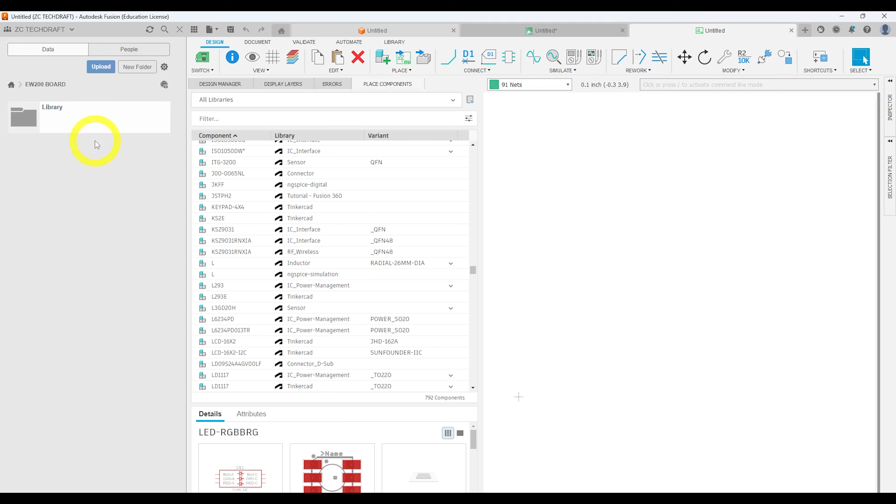So we are going to go ahead and upload some of these to our folder. I'm going to click New Folder and create Electronics Library. So this is going to hold all the components that we have to make for this project. And then the general folder will just contain the overall board and schematic. I'm going to double click on library. I'm going to click upload, select files,

go to that file, and you want the Pico package through hole v3. I'm going to hold control and also select this Raspberry Pi Pico library. The SMD and the V2 are other types of Pico boards that are for surface mount soldering or something, and we only want the through hole one, so we're going to just upload that one. All right, that's going to take a minute to upload.

And you can see now we have a Pico through hole with headers already attached to it, and then a Pico library as well with the component, with the symbol, and the package for through hole.

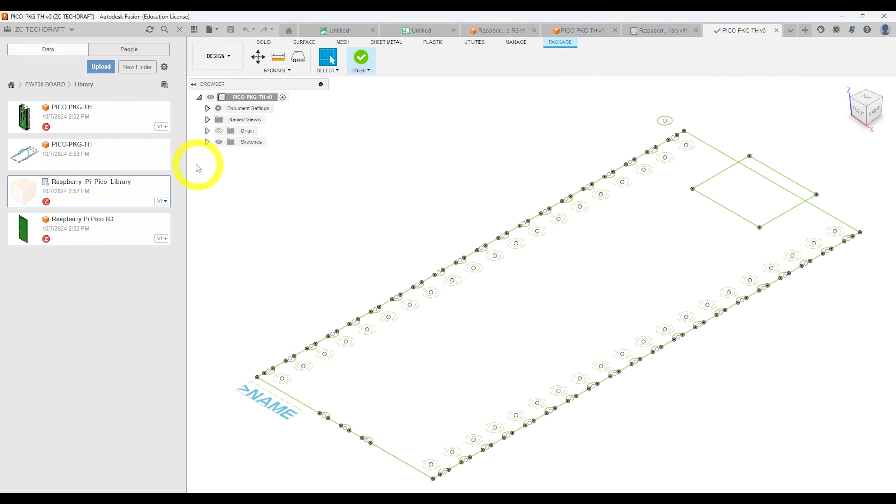Now, our Pico package through hole isn't linked to the 3D model. So I'm going to right click and click create new 3D model. Click save. And I can just drag this Pico package through and drop it in there. And that should be lined up. So I'm going to click finish. And now that is linked to it.

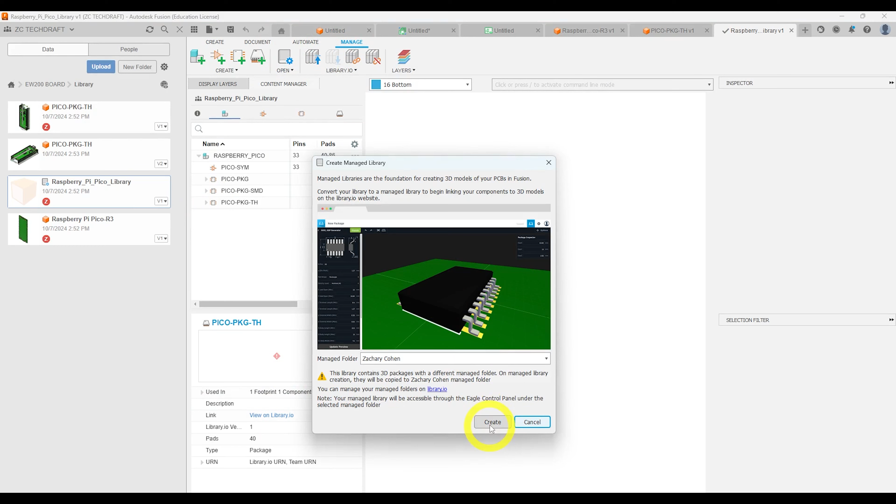So if we go back to our components, we see under Raspberry Pi Pico, Pico package through, we have a board attached to it. All right, we're going to upload this all to library.io. And you can just click create. And this is going to put everything on a web server so that you can access it a little bit easier, maybe down the road if you need to.

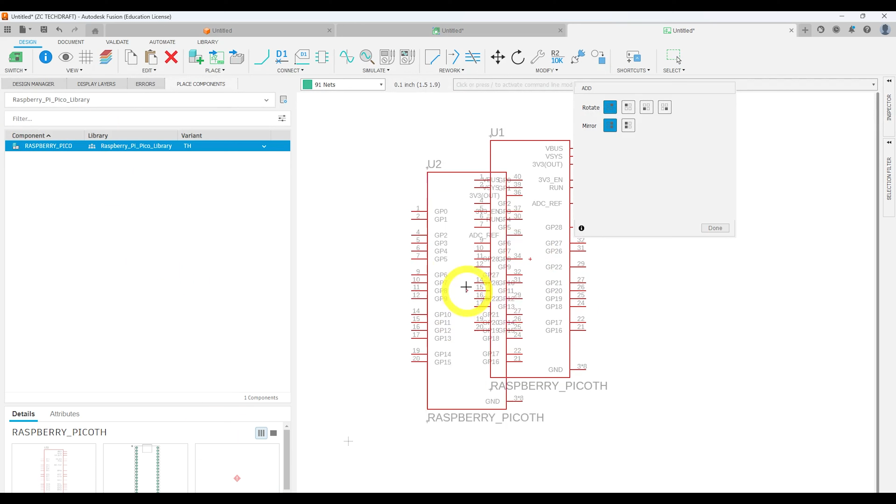All right, so let's close some stuff here because we don't need it. And we're back in our schematic. So let's go ahead and place our Pico first. So I'm going to click this drop down and go to Pi Pico. And I want the through-hole version, and it's saying it's not linked to the 3D model, so I'm going to have to fix that. But let's first place our Pico in our schematic.

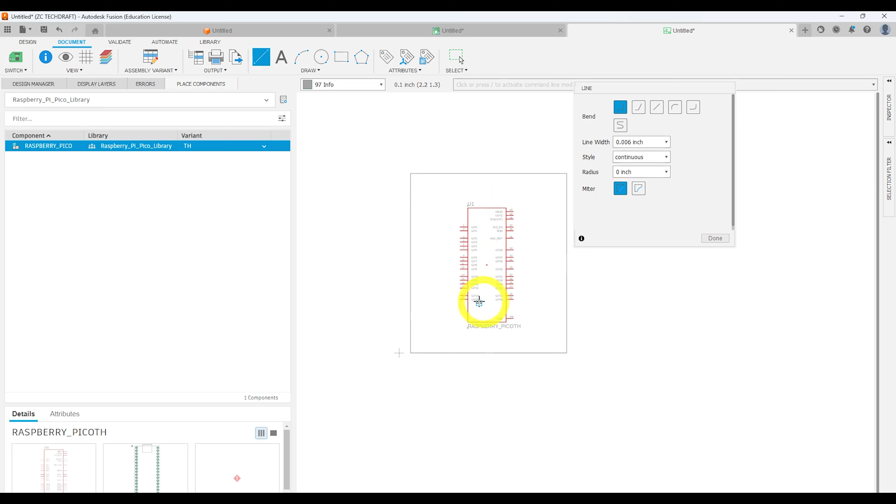And I'm going to go to Document, Line, and I'm going to draw a box. So I'm going to go to Info and draw a box. So we're going to want a box around each of our sets of components so that we can kind of keep them labeled. And I'm going to put text here that says Pi Pico. And maybe make that a little bit bigger.

So I'm going to click Inspector and change my size to, say, 0.15. That's a pretty good size there. All right. Now, we need to add a few things to this. So we have each of our GPIO pins. We have our V-bus and V-sys, our 3.3 volt out, and our ground. And we need to attach some of these pins. So I'm going to click my drop-down and place components. And I'm going to go to Power Symbols.

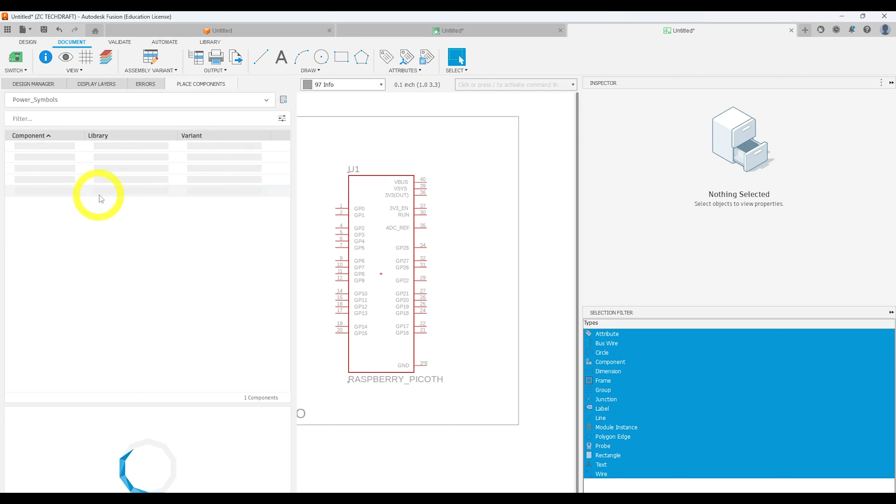And I'm going to place a 5 volt symbol up here. Click OK. 3.3 volt symbol up here. Click OK. And then I'm going to scroll down to GND for ground and place that down here. All right, let's go back to design.

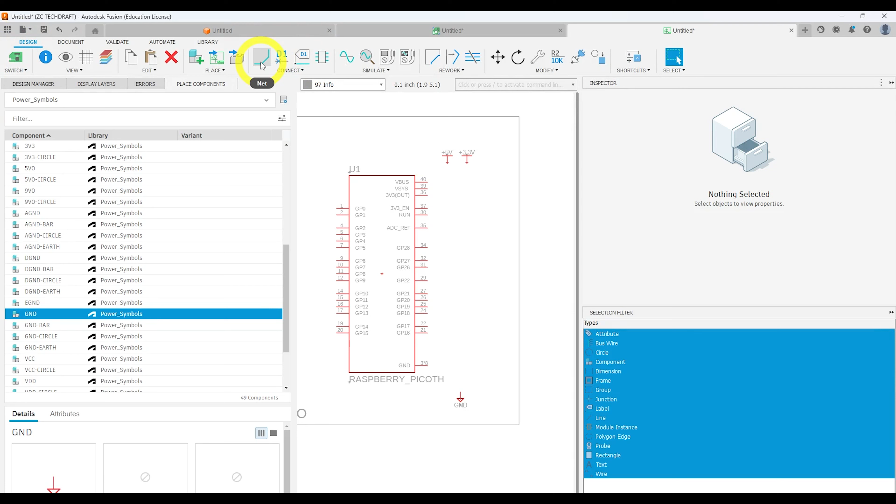And nets are like wires. They're the connections that you make. So I'm going to click on this. And I'm going to click my VSys to 5 volt. And my 3.3 volt to 3.3 volt. And my ground to ground. Now, there are some GPIO pins that we're going to use to control everything, but we don't really know what those are yet. So we're going to leave those blank, and we'll add to them as need be.

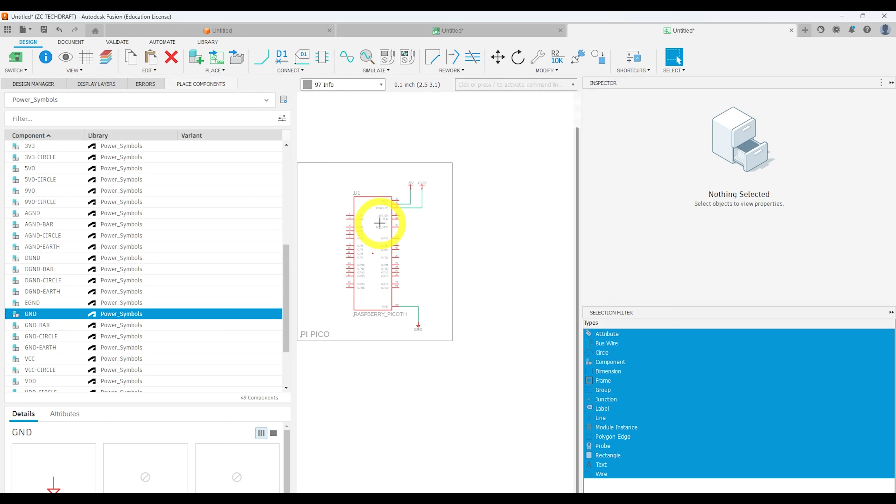So let's go ahead and first place our component, being our potentiometers. So we're going to have 2 potentiometers on this, or variable resistors, so that we can change color of something or have them be really any input we want. So go to potentiometer_trimmers. And we're going to go down to this 3310Y-001-104L. And I'm going to place 2 of those.

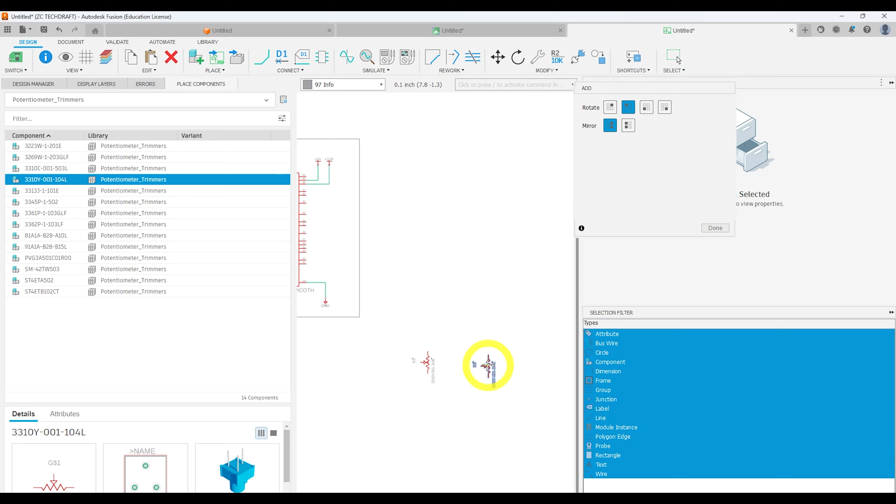Now I want to rotate this. So I'm going to right click to rotate. And I'm going to place 2, as I said. And press escape to get out of the command. All right, let's go ahead and go back to document and line. And make a box around them. I'm going to borrow this Pi Pico, copy and paste. And change that name to POTS. POT is short for potentiometer, and we have 2, so POTS.

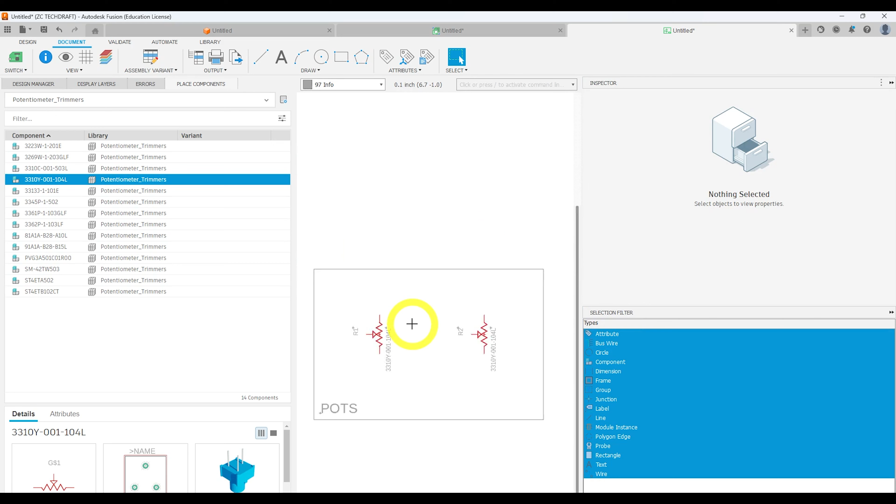All right, go back to design. These have a resistance value to them. So I'm going to click value and click on the resistor. And it's saying it doesn't have a definable value, but that's not really true. So we're going to click yes, and we're going to label this as 10K. And then do the same for the other one.

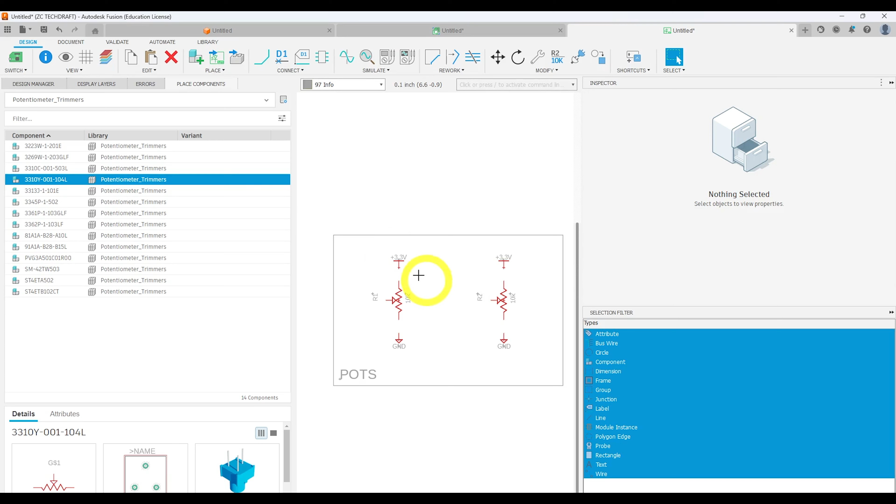All right, so on the top, we're going to have 3.3 volts. On the bottom, we're going to have ground. Usually you have ground going down and power going up. So I'm going to select this 3.3, copy it, and paste it a little bit above each of these. Borrow my ground, copy it, and paste it a little bit below that. Let's go ahead and hook up those nets.

And then we're going to come off of this, and we're going to just click and click escape after we have a short line. And these are going to be hooked up to some of our GPIO pins so that we have an input for the potentiometer. So let's go ahead and name that GPIO pin. So I'm going to click name. I'm going to click on the line. And I'm going to label this GP26.

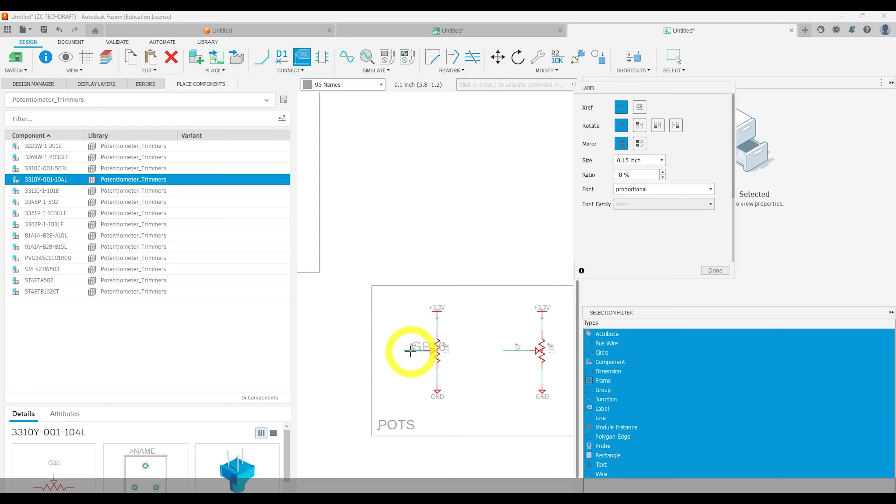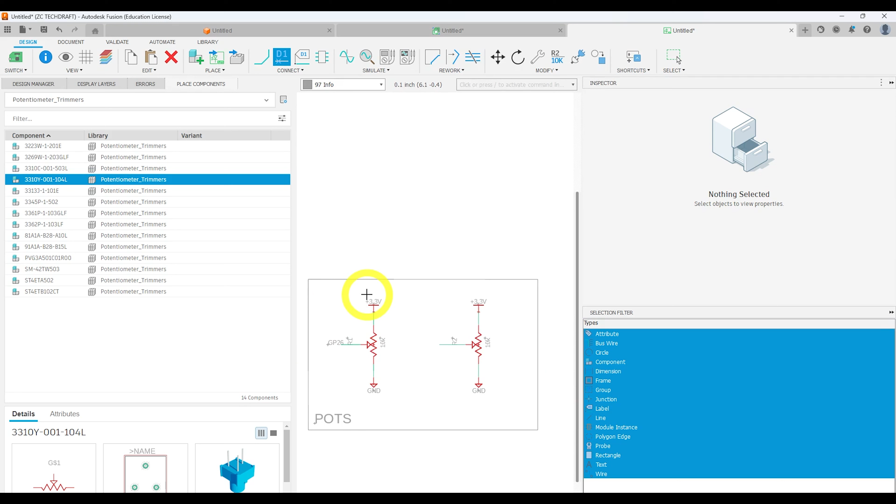Now, these are analog components, being that a variable resistor or potentiometer puts out a range of values, not just ones and zeros. So we need to make sure that we go to one of our GPIO pins that can handle an analog device. And so GP26 is one of them. Also, GP27 or GPIO27 is another one. All right, so let's come up and put the names on here too.

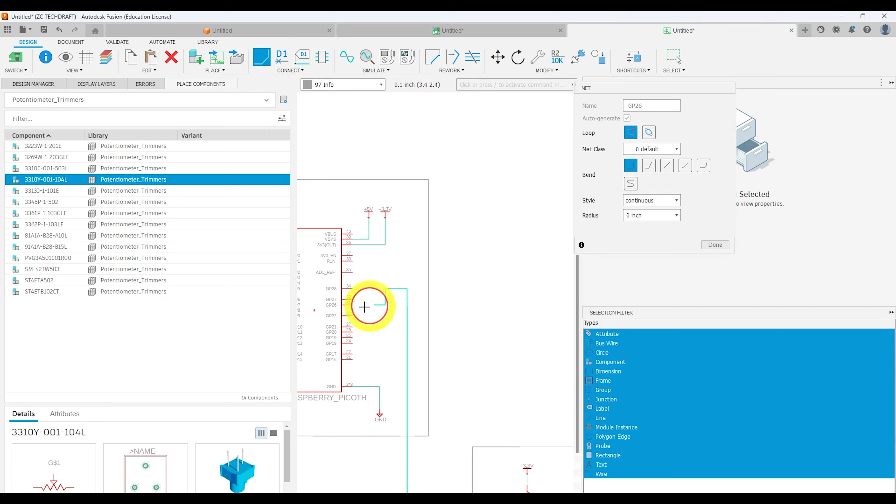So I could theoretically just draw a wire that connects like that, but that is pretty messy having that all over the board. So instead we use names. And so like this 3.3 volt is a name, and this is saying that anything that's connected to that, like this up here, this down here, those are all sharing the same wiring connections. So GP26 is going to share a net with GP26.

And I'm also going to place one for 27. And then I'm going to go to name and name those GP26 and 27. You can see it comes up with them. And then click yes, you do want to connect those. So now this wire coming off here is connected to this wire here. And this wire here is connected to this wire here, just because we named them the same thing.

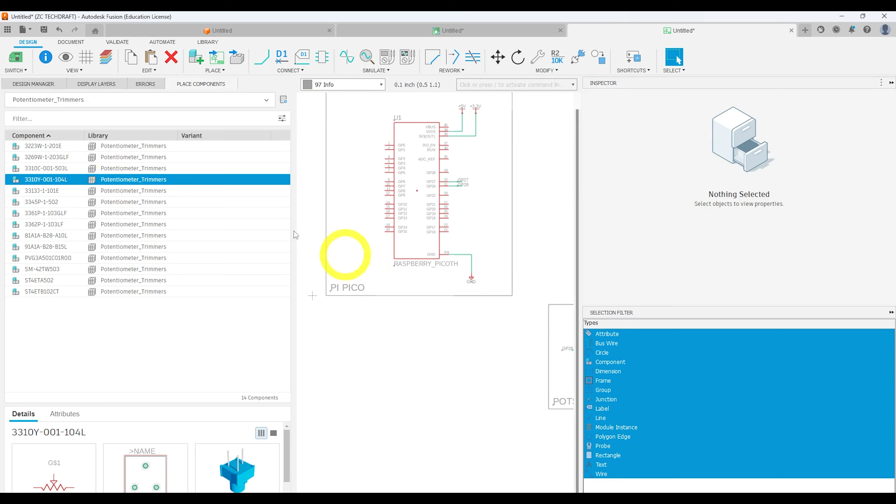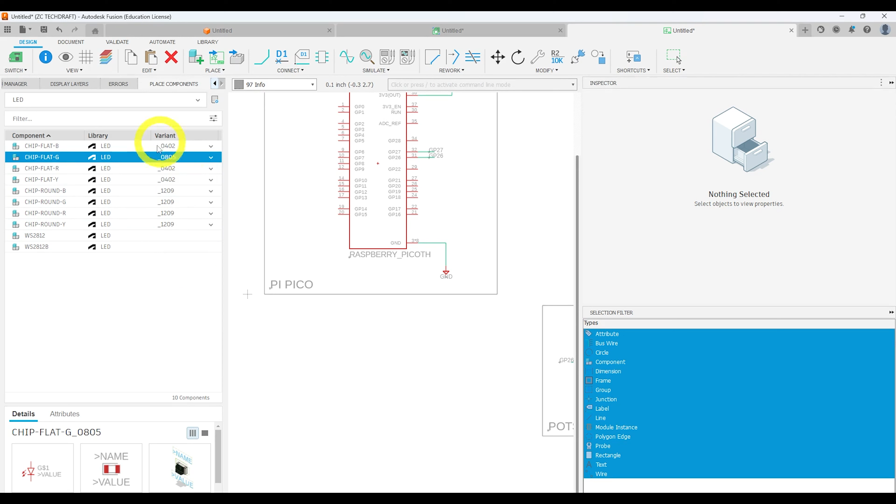All right, we're also going to have a surface mount LED that we can turn on and off. So I'm going to go to LED. I'm going to make this just a little smaller because we don't need it to be so big. And it is a green LED. And then we can select the variant. So this is the size. 0402, 0603, all the way up to 1206 are sizes for surface mount components. And we want 0805. It's important that you select that 0805. And I'm going to place that just below my Pico.

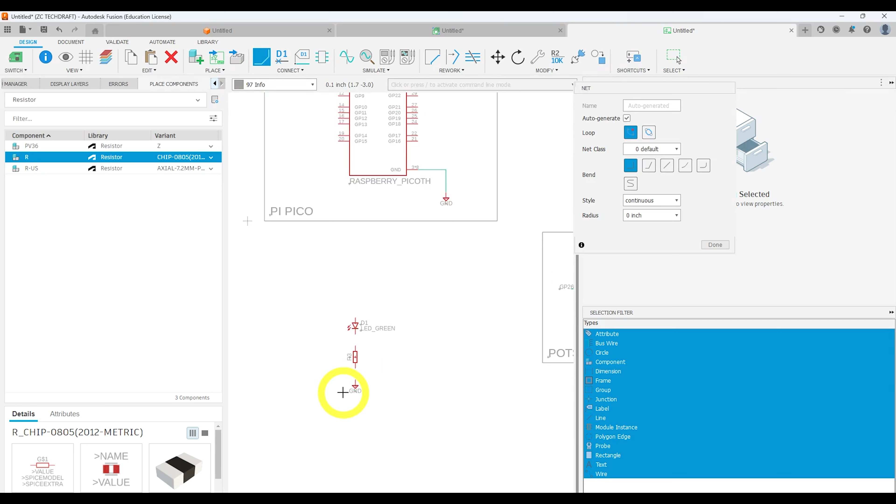Now you need a resistor in series with the LED. So I'm going to go to resistor and select R. Click the drop down, go to 0805 again. Rotate it by right clicking and place it just below it. Now we need a ground below that. And then let's hook everything up. So we're going to connect the resistor to ground, the resistor to the LED, and then I'm going to come up and place a little tab here so that we can name this.

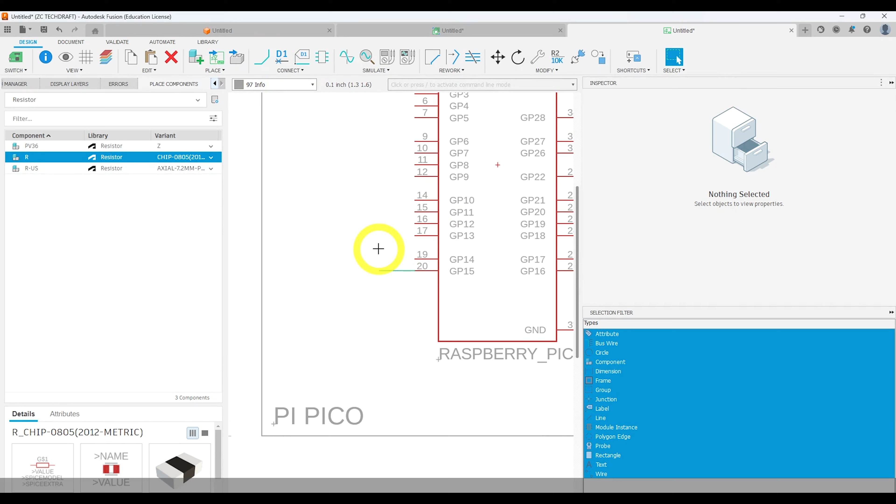This is going to go directly to a GPIO pin, GP15 to be exact. So that means we should label it up here as well. I'm going to click N on my keyboard to go to name and name this GP15. And yes, I want to connect it. All right, let's draw a box around our LED.

I'm going to borrow this name, place it there, and I'm going to change this to surface mount or SM LED for surface mount.

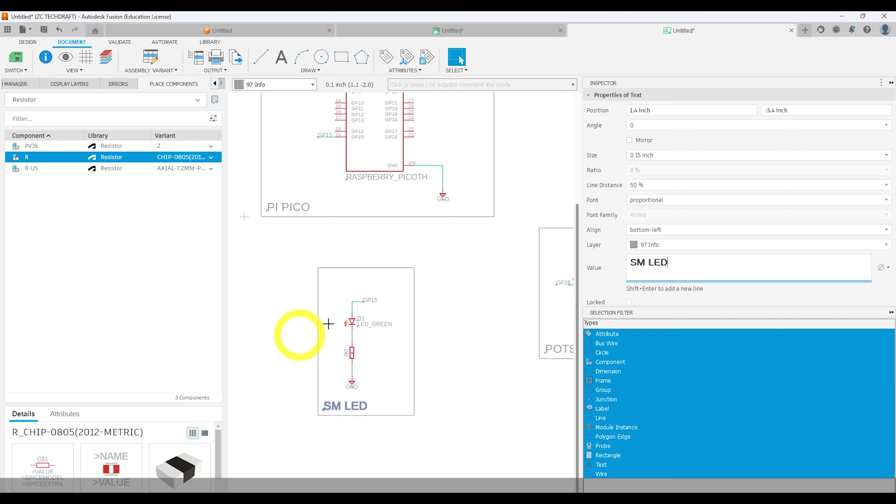All right, so we have two more components that we need to add. We need to add a small buzzer, and then we also need to add a 3-pin or 4-pin really LED that can do red, green, and blue. The problem is those devices aren't in our libraries. Now, we can probably find them, but it's a little bit hard to find a library sometimes, and they're not always made very well. And so I often like to just make my own library items.

So if I go to the internet and I go to DigiKey, which is a common supplier for electronics components, this is where we bought everything for this project, I can search 102-3764-ND, and that's going to get me this buzzer. So this is the exact buzzer that we are using on our board. Now, there is some information here for just making sure it's the right buzzer, but we want to go to the data sheet, and this is going to have all kinds of information. So the data sheet is kind of where you always want to go for your components.

It has our rated voltage, which is 3.5 volts, minimum of 3 volts, maximum 5 volts. That's good because our Pico puts out 3.3 volts, so that's close enough. And then if we continue to go down, we have our mechanical drawing here, and this is what we are going to need to make a library item.

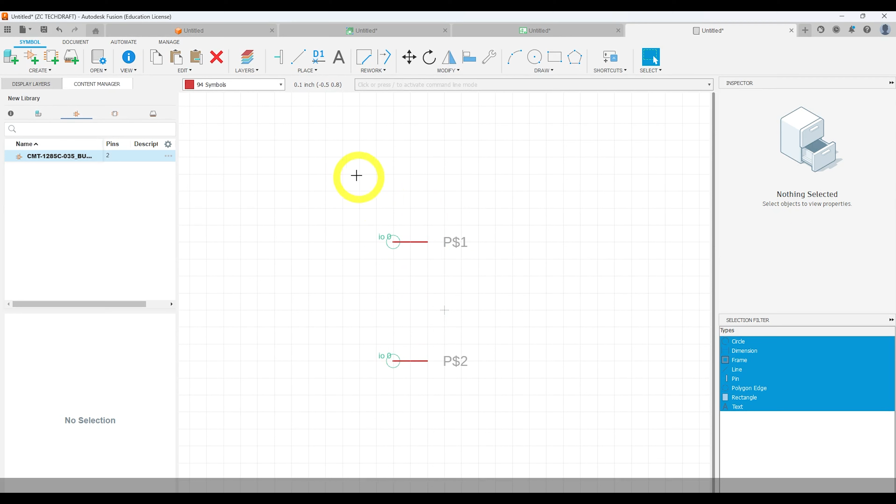So back in Fusion, I'm going to click File, New Electronics Library, and I'm going to create a new symbol first, and I'm going to label this CMT-1285C-03S. So that's the name of the buzzer, and then I'm going to underscore buzzer. And then we can draw the symbol for our buzzer. Now, a symbol for a buzzer is pretty simple. We first want a pin, so this is what we connect to. I'm going to put one pin here, one pin there. So that's like our input and our output pins. Press escape. And then we're going to draw our buzzer.

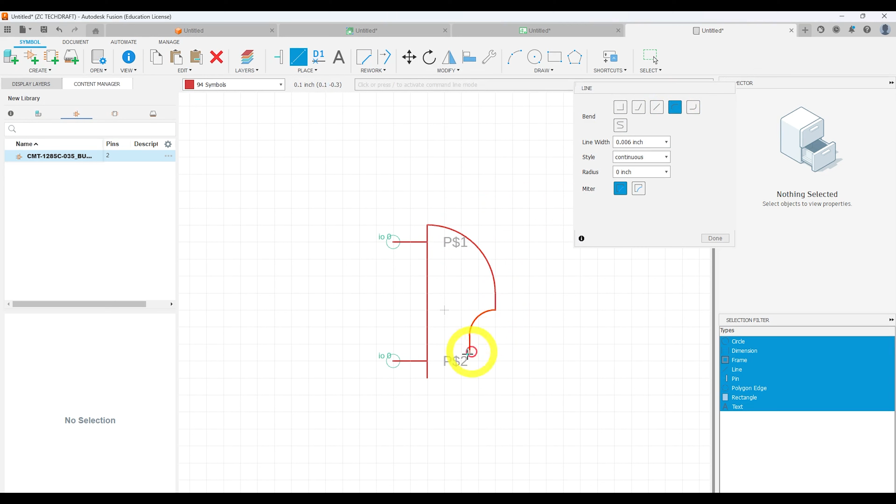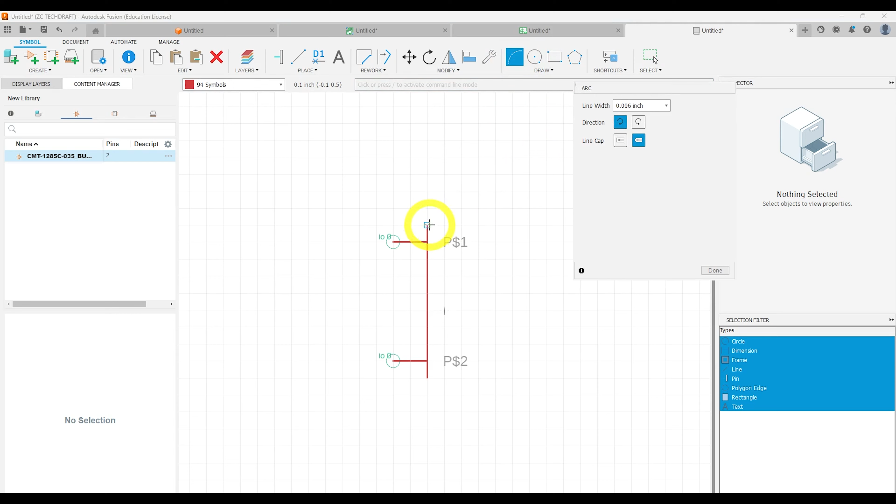So I'm going to click on line. I'm going to come one box below my line. I'm going to come up. And then I'm going to switch to a curved line. And I'm going to kind of mess with it until it draws in the correct direction that we want. So we're just making a half circle. Now you can also, instead of doing that, because that's kind of a pain, you can create an arc. So I'm going to click on my starting point, my ending point, and then draw the arc. So that's probably an easier way to draw that.

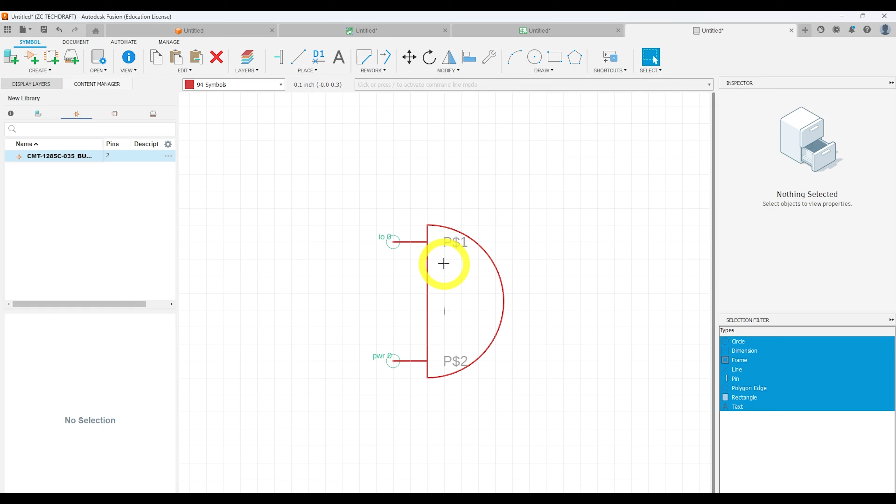All right. Now this is it for our symbol. We have an IO pin coming out. Actually, this is going to be a power pin going out. That's going to be our ground. And now we need to create a footprint. So far we've only worked with a schematic, but we're going to create an actual physical layout of our board too, which is what you're going to solder together. And so for that, we need a footprint too. So I'm going to create a new footprint and label this CMT-1285-C-035 underscore buzzer.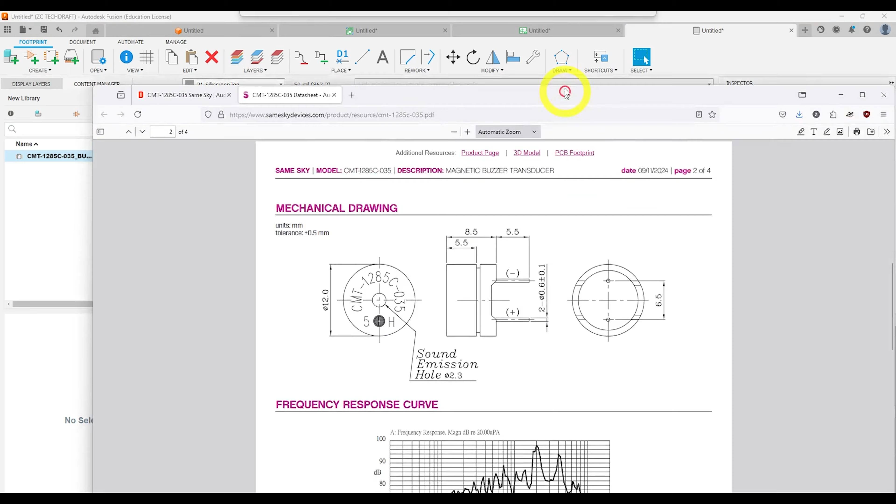Now, it's currently in mils or thousandths of an inch, but if I just type in 0.7 mm and press tab, click out of it, then it'll convert it to mils for me. So I'm going to just place two for now, one below and one above my little plus here. That's my origin, my 0 point. And then looking at this, it is 6.5 millimeters between pins, and my origin is kind of in the center.

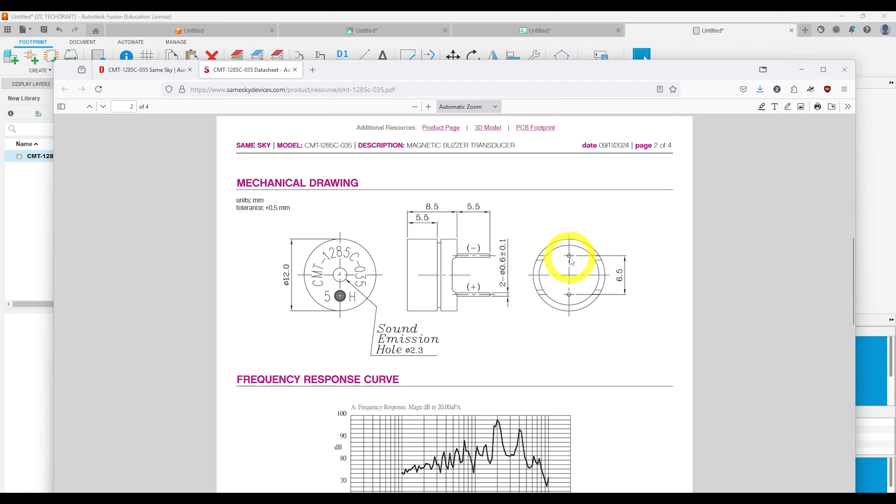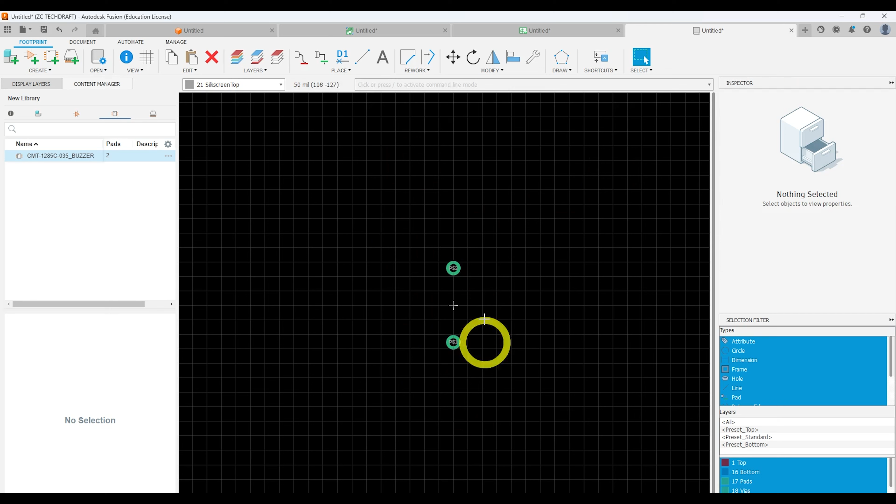We need to make a determination point of where our origin will be, and the center is a pretty good place for it. So that means I need to go 3.25 millimeters up and 3.25 millimeters down. So I'm going to click on my first pin, and this is my X position and my Y position. So I'm going to type 3.25 mm for my Y, and then click on my lower pin and do negative 3.25 mm, and there is our pinholes.

Now we also want to draw a circle around to show the diameter of the speaker itself. So I can go to draw and circle, and come out and just draw a circle of any size for now. Now, if we look at our data sheet, it's a 12 millimeter diameter circle. So I'm going to click on my circle, and I'm going to change my radius. Notice radius, not diameter. So 6 mm, and that gives me the proper diameter. All right, now we're going to click.

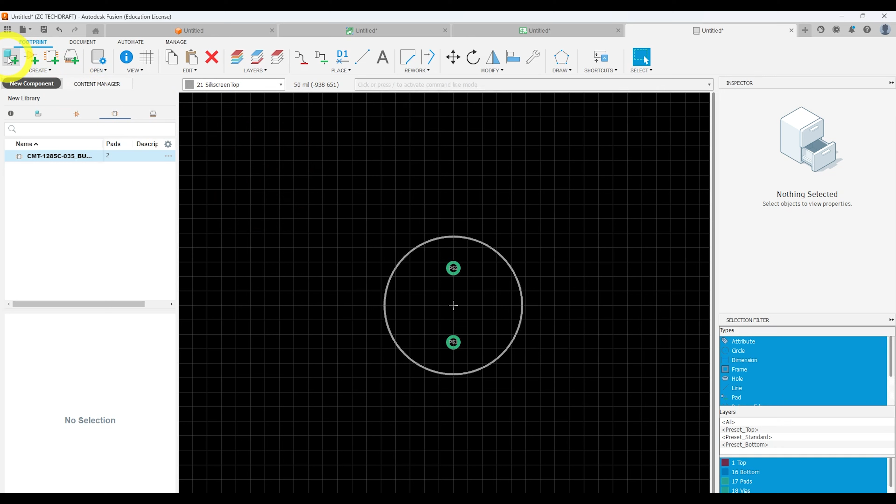So we've created our footprint. We've created our schematic. Now we have to link them together. So I'm going to create new component and label it just like before. And first I'm going to bring in my footprint. So I'm going to click add. And because this library only has one device so far, I'm going to just select the one that exists and place it kind of in the middle on my origin. Now I'm going to go down to new, add local package, and add the footprint that we just created.

So I have my footprint added. It's right there. And we need to associate these pins with these holes. So I'm going to click connect. And I can just link pin 1 and pin 2. So those connect each other, and click OK.

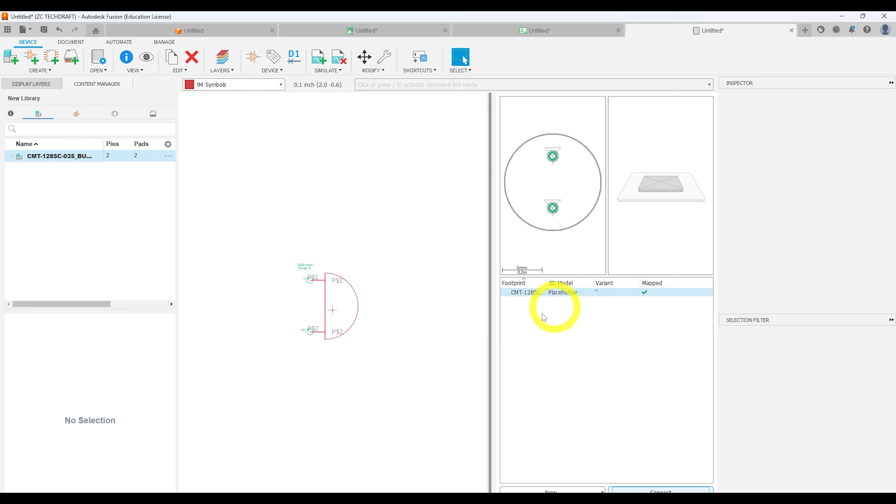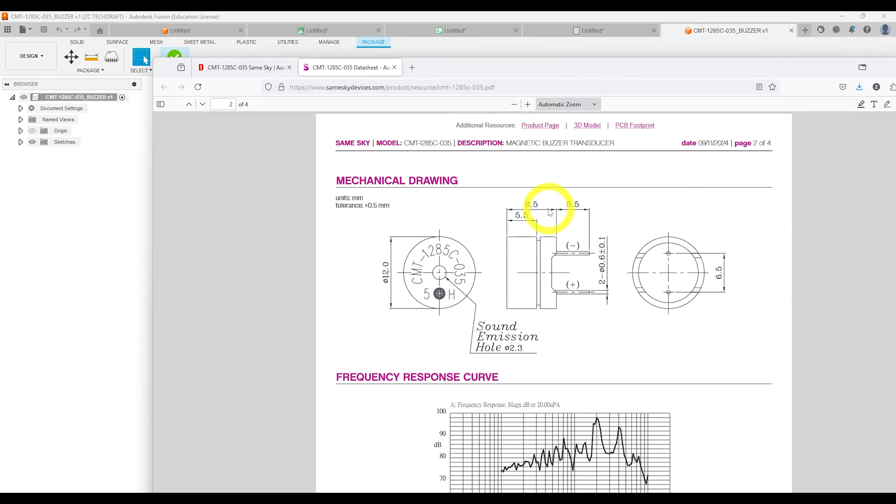Now this doesn't have a 3D model, and we do want a 3D model, at least a simple one. So I'm going to click the drop down here, right click on the device, and click create new 3D model. And we can just click save. And we don't need to do something fancy for this. Really, we just need for our enclosure the size of the speaker. So we can see it's a 12 millimeter by 8.5 millimeter cylinder. And so let's just go ahead and draw that.

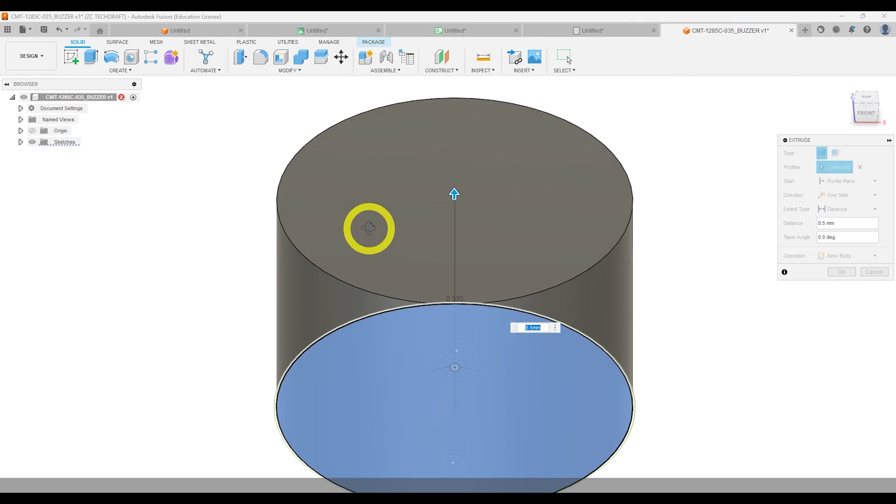I'm going to click solid, create sketch, draw on my front plane, draw a 12 millimeter circle, and extrude it 8.5 millimeters. You can see that goes up. That's good enough for what we need. So I'm going to close out of this, and it's going to automatically save. And you can see that's going to link it to my model. So there it is right there. Yep, we have our buzzer.

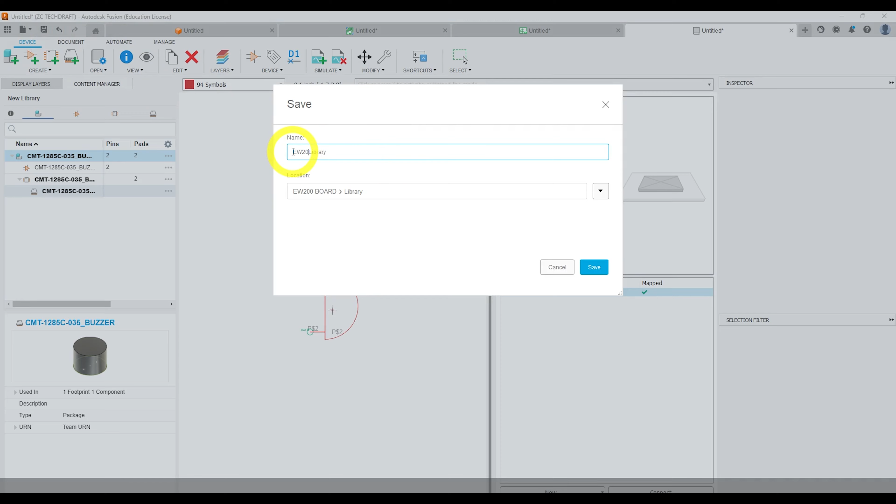And then I can go ahead and save this library. Now I'm going to just name this EW200 library, because we're going to add another component to this soon. All right, let's go ahead and go back to our schematic and add that speaker that we created. So let's find the library we just made and find the component that we just made and bring that in.

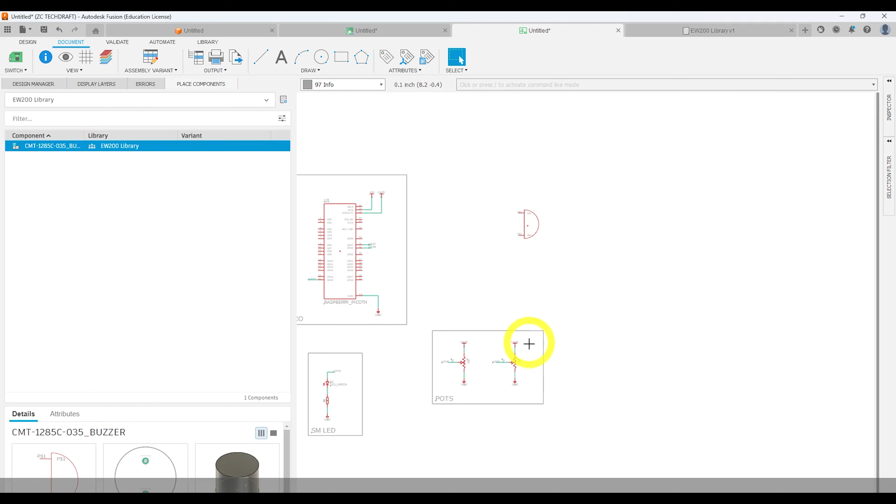All right, we're going to need a ground on the bottom. And then the top is going to go to a pin. So I'm going to click R to do nets and just draw out a line. N for name, and name it. We're going to hook this up to GPIO 9. Same thing. I'm going to find GPIO 9, draw out my line, and name it GP9. All right, so that is connected.

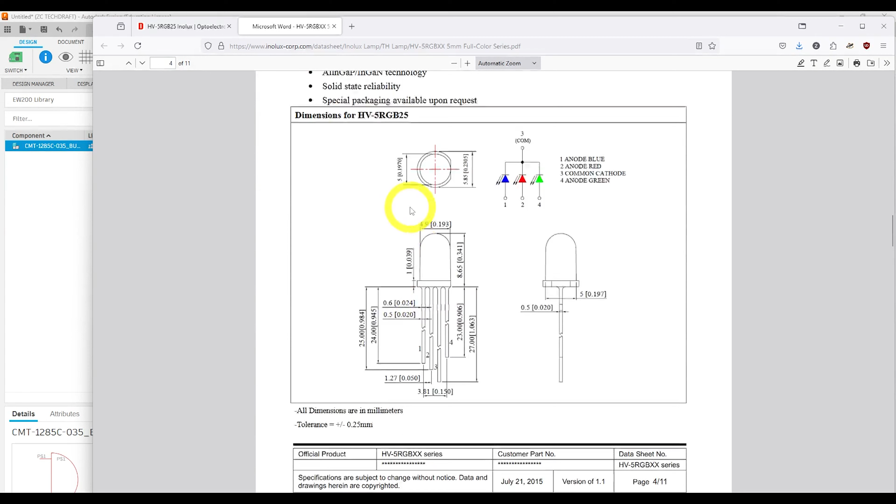Next up, in our last device, we're going to have a 3-color LED. So in DigiKey, I'm going to search 1830-1015-ND. That's going to bring up this 4-pin LED that we have here. Let's go ahead and go to the data sheet. And we're going to scroll down, and there's some information about it. And we're going to get to our dimension drawings, which is great. So we have what the schematic symbol looks like, and then what the actual LED dimensions are.

And, oh wait, I have dimensions for another LED here too. But we are an HV-5RGB25, and this is RGB60. This is RGB25, so this is the one we want to use. Going down more, there's some data about the actual LED that you can look up. But really, for now, all we care about is this dimension sheet here.

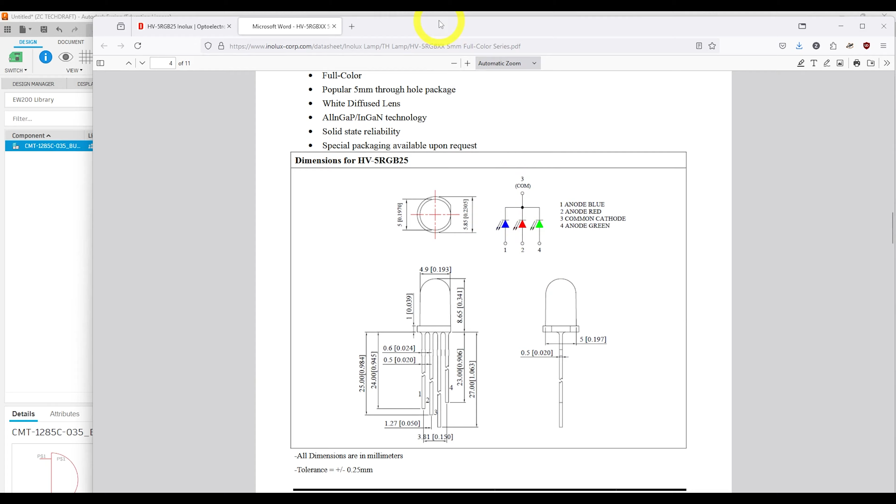So let's go ahead and recreate this schematic symbol in our library. So I'm going to go back to EW200 library, click new symbol, and label this HV-5RGB25_LED.

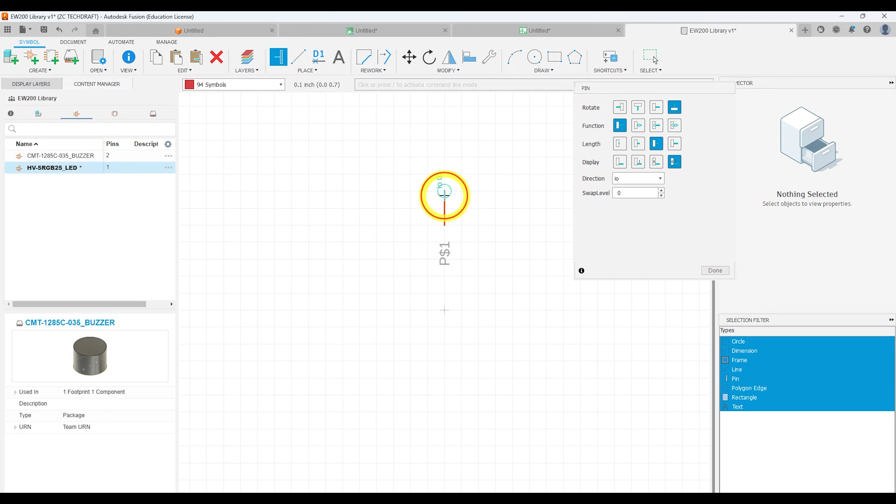All right, we're going to create one pin, so I'm going to rotate, and that's going to be my common or my ground or my cathode. And then I'm going to create another 3 pins below that for my R, G, and B. All right, we're actually going to drag this down a little bit to give us some room, and we're going to drag them in one so that there should be 2 spaces in between each.

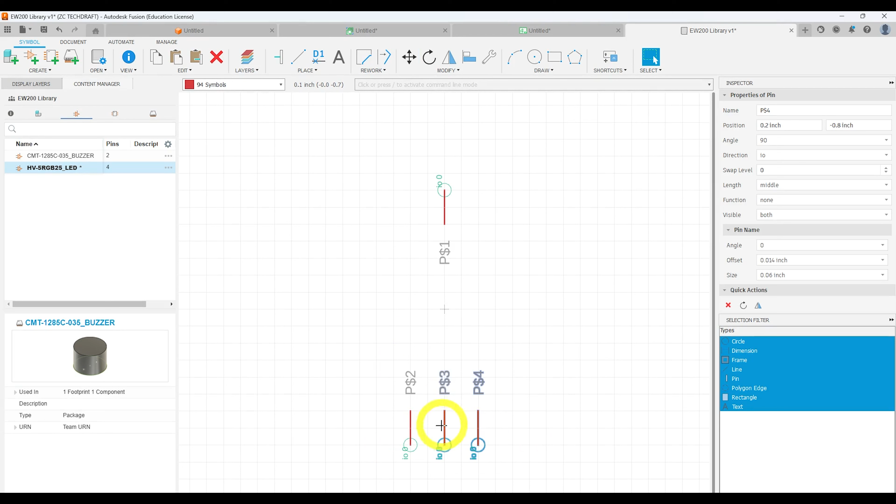Let's go ahead and name these. So I'm going to click on my first one, and I'm going to name this COM. And I'm actually going to name it 3COM because we can see this is pin 3, and by putting 3COM, it just makes it easier when we have to attach our pins. And then I have my first pin, which is 1 blue. So I'm going to just go 1B, B for blue. And then I have pin 2R. And then this is pin 4G. And again, I'm just going off of my data sheet here.

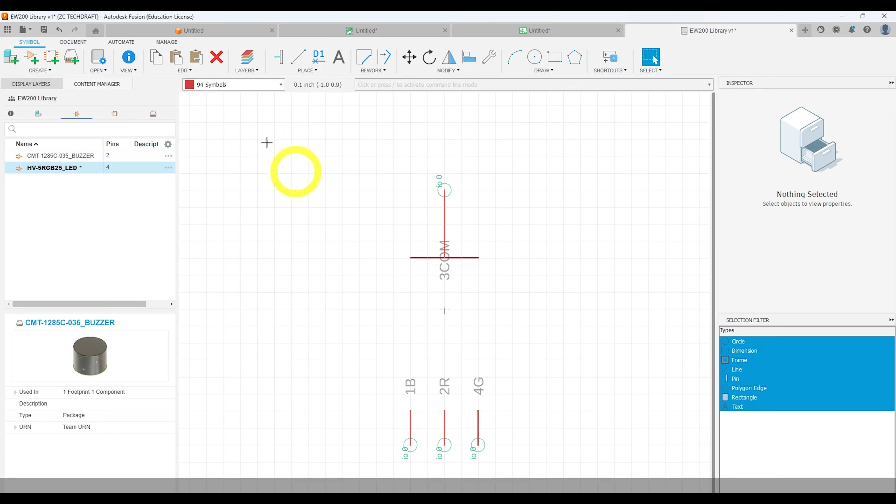All right, we do have to create that symbol. So let's go ahead and draw a line. And I'm going to come down. I'm going to make this a straight line. I'm going to come down a little bit. And I'm going to branch out. All right, and then I'm going to come up a little bit. And now we're going to make a triangle. I can go to polygon shape.

And I never use this, so I always forget how it works. You know, I'm actually going to just use the line tool. I'm going to select this angled line here. And I'm going to just draw my triangle. Yeah, those don't look very good, so let's redo those. And actually, I was wrong. I do want those spaced 3 out. Oh, geez.

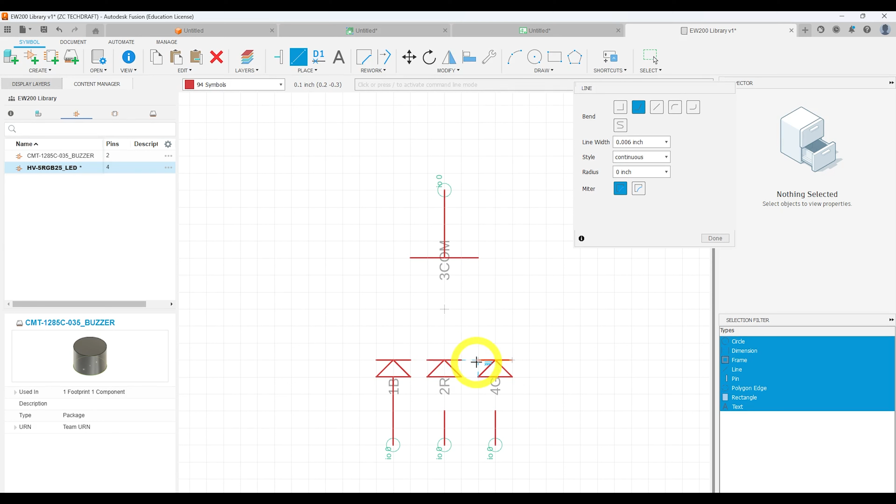All right, and then we need a line over top of them, which is kind of the symbol for an LED. And then let's connect everything. Oh. All right. And there is our LED. Not the best looking LED I've ever drawn, but it's going to work for our purposes.

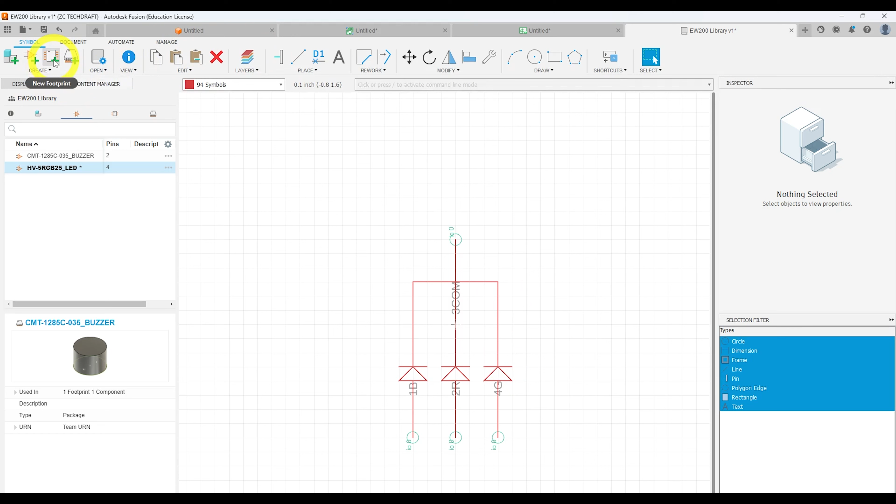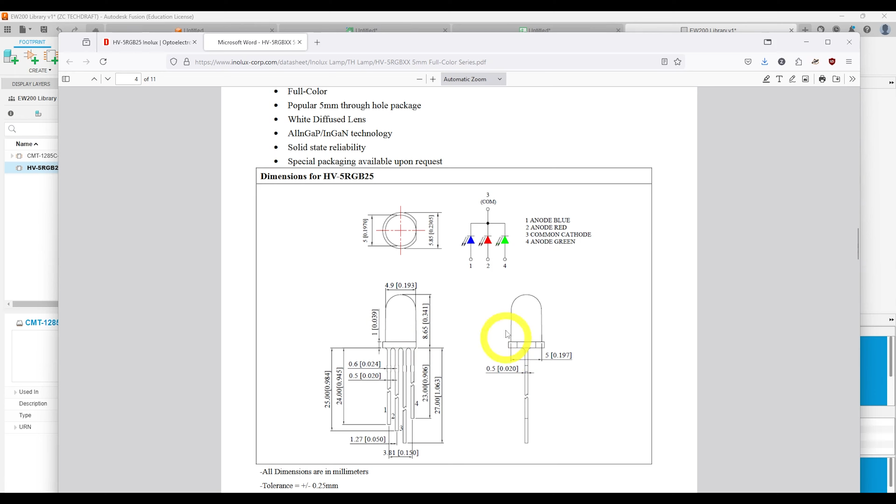Now, let's go ahead and make the actual physical footprint. So I'm going to click New Footprint and type in the name of this. And do through hole components. So we can see each of our pins is 0.5 millimeters. Or 0.02 inches, but we're going to stay in millimeters and just do 0.5. And so I'm going to do a hole size of 0.6 millimeter to be a little bit bigger. And then I'm going to place my pins. So I'm going to just go 1, 2, 3, 4. And let's make sure those are lined up correctly.

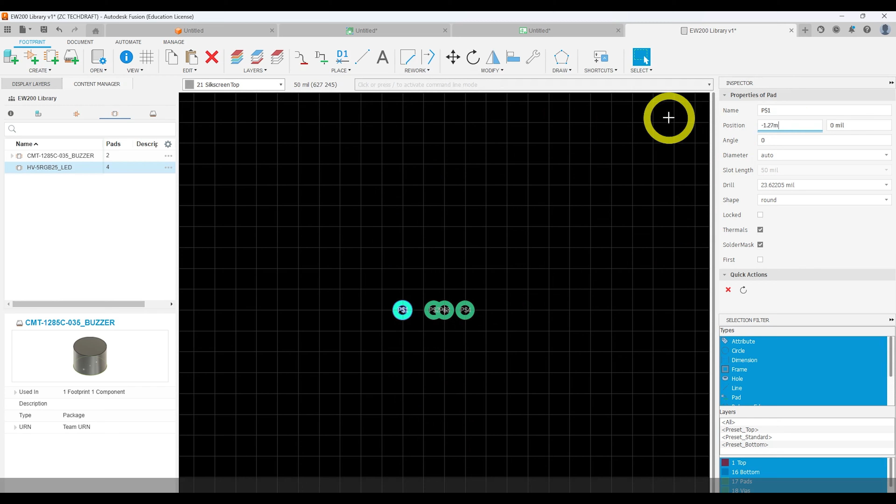So in the middle, I have no pin. And then in between each pin is 1.27 millimeters, which if I divide by 2 is 0.635 millimeters. So I want my first pin to be negative 0.635 millimeter. And then my next one is going to be 0.635 more. So that's going to be negative 1.27 millimeter. That doesn't look quite right. Let's go back to my data sheet.

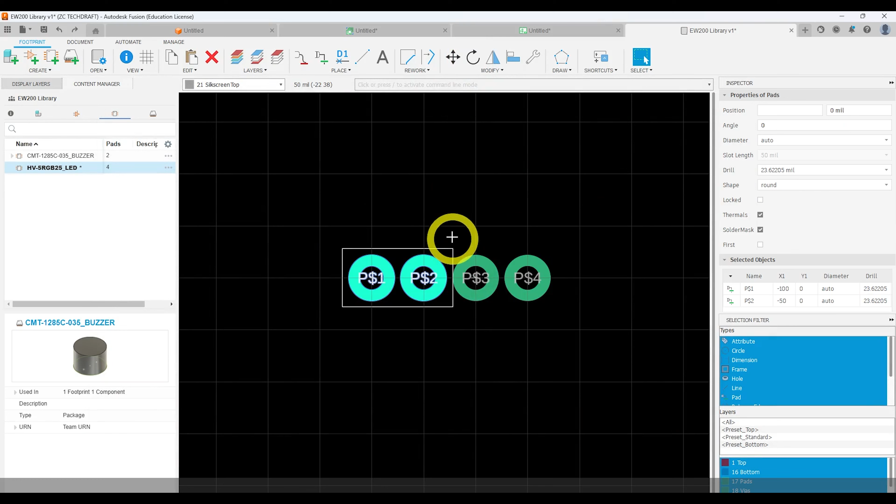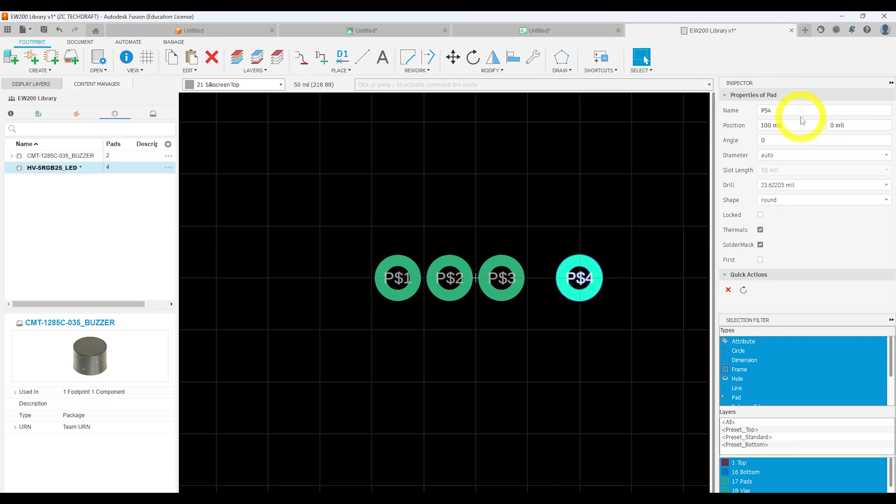Oh, no, I was wrong. Sorry, it's 1.27 millimeters in between each one. I don't know why I divided that by 2. So I'm going to just do negative 1.27 millimeter, which is 50 mil. And then 100 mil, and then 0 mil and 50 mil work for that. Now, I do want these centered. So I'm going to actually drag this over and then do negative 25 mil. Negative 75, and then plus 25, and plus 75.

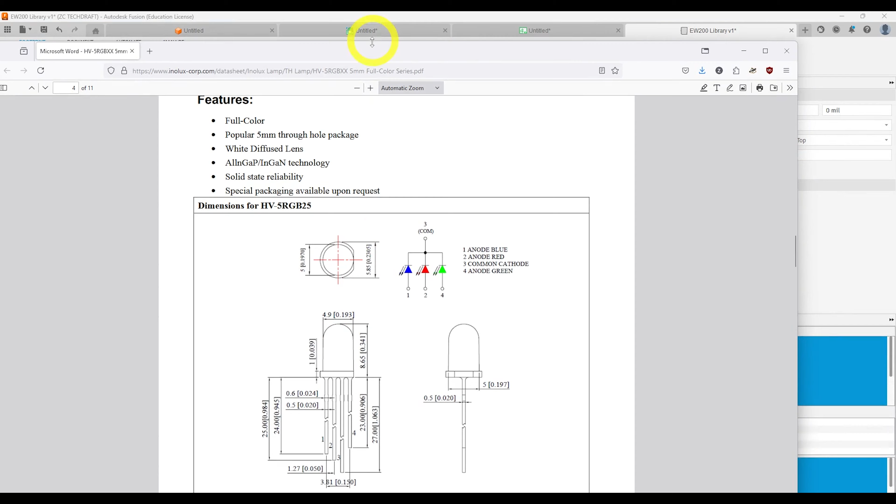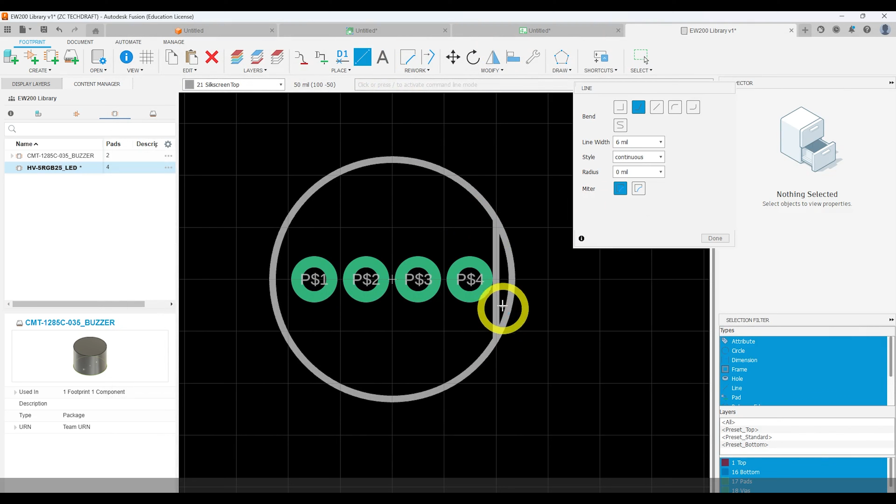All right, let's go ahead and draw our circle to be our LED. And this has a diameter, looking at this, of 5.85 millimeters. So that is 5.85 divided by 2. So 2.925 millimeter. 2.925 millimeter. And there's my LED. And then LEDs do have a flat on one side. And I do want to represent that in my drawing. And so I'm going to just draw a line kind of down there. And then I don't think I can trim, so I'm going to just leave that as is.

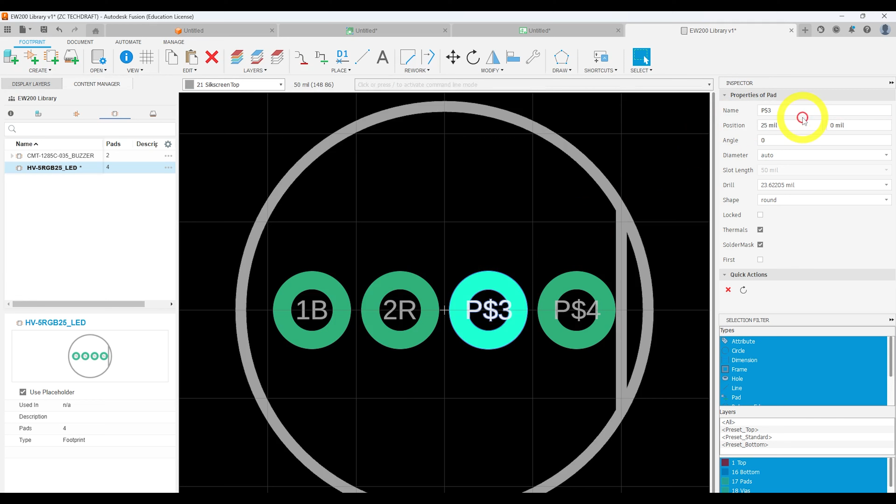All right. Let's go ahead and create our component for this. And then add our symbol. Oh, I did forget one thing, so let's go back to our footprint and go back to our device, and I want to change these names to be more descriptive. So this is going to be pin 1 is 1B, pin 2 is 2R, pin 3 is 3COM, and pin 4 is 4G.

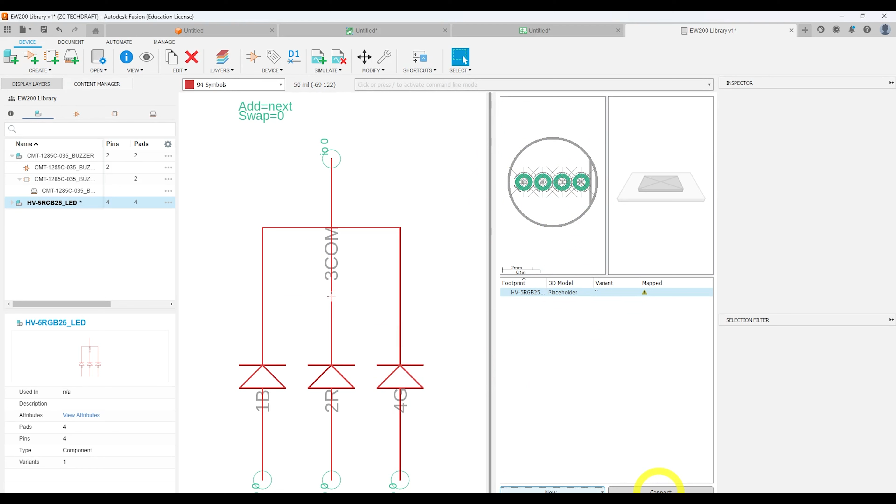All right. Now we can go back to our footprint, to our component. Double click on our component and click New, add local package, and add our footprint. Let's click Connect. And this is why we named everything, because our pin and our pad have similar names. So it's really easy to just make sure they're connected properly, and click OK.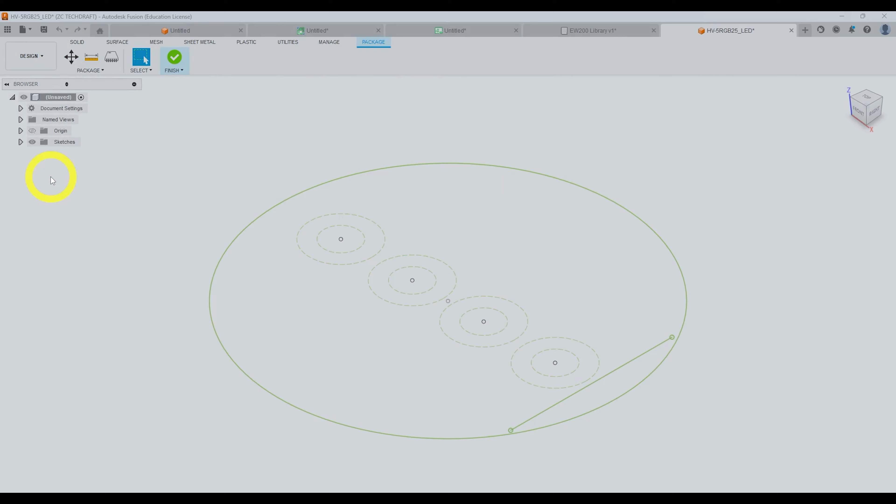All right, let's create a 3D model for this. So I'm going to click the drop down, right click on my footprint, and click Create New 3D Model, and click Save. Now, Fusion has a package generator for common devices. So I'm going to click Package Generator, and I'm going to scroll down and down, and there is a radial LED. There's a lot of different components that are good to look at, but we want our radial LED.

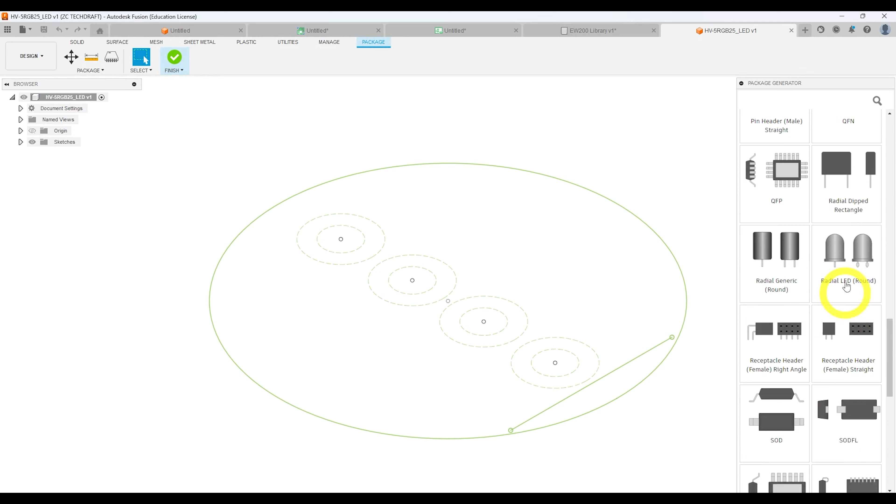The body, we want white, and then we're going to have to get from the data sheets each of these values. So E is 0.5. E is actually 1.27. And then B is 0.5 mm, and I forgot that, mm. And then C is also 0.5.

Now we need to do the body. This is really the part that matters. So for this, it's 4.9 mm for our minimum size. And this doesn't really give us, I mean, it does give us a tolerance of 0.25 millimeters. So I could do 4.9 minus 0.25, which is 4.65 millimeter for my smallest. And then 4.9 plus 0.25 is 5.15 millimeter.

And then A is the height, which we have 8.65 millimeter. And then A1 is going to stay at 0. I'm going to click add. And there it created our LED for us. Now, it's not perfect. It has 2 pins, not 4. But again, we really don't care about that.

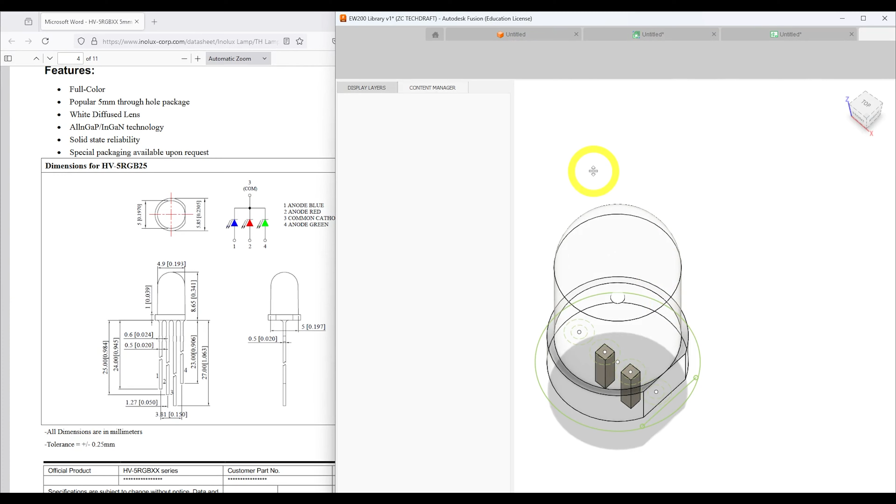We care more about the top of it to make sure that when we make it in our enclosure, we have an accurate 3D model. And so this works for our purposes. So let's click finish. And then I'm going to Control S to save our library. And then I'm going to go to my schematic. I'm realizing I forgot a box for my buzzer.

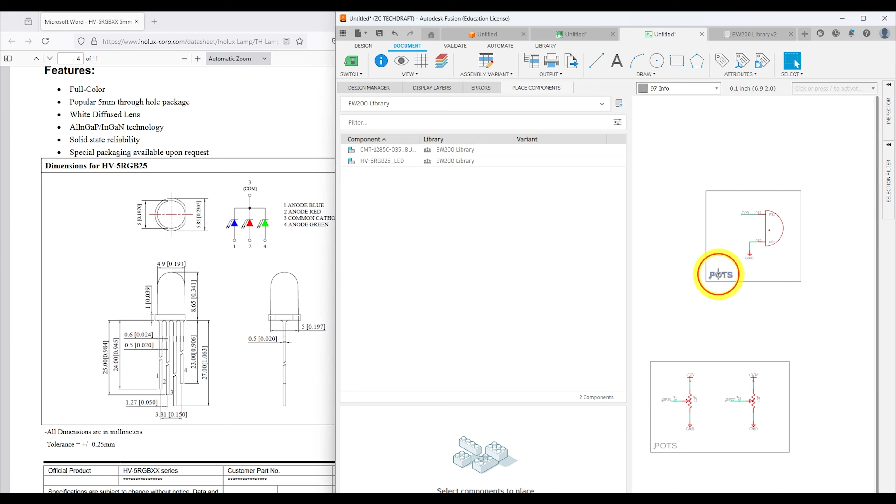All right. And then let's come over here and place that LED. Just spin it around because our GPIO pins are going to be on top and our ground is going to be on the bottom. Now, just like we had here where we had a resistor in series with our LED, we need resistors in series with our LED even for a 3-pin. So I'm going to go to resistor again. And this time I'm going to select a 7.2 millimeter pitch axial. And I'm going to place 3 of them, 1 for each pin.

Let's go ahead and connect them. And then give them a value. So V for value. And I can click on each and do 220. All right, and then I have to connect ground. And then these are going to be my GPIO pins. So I'm going to just come up. And these are going to be GPIO 20, 21, and 22.

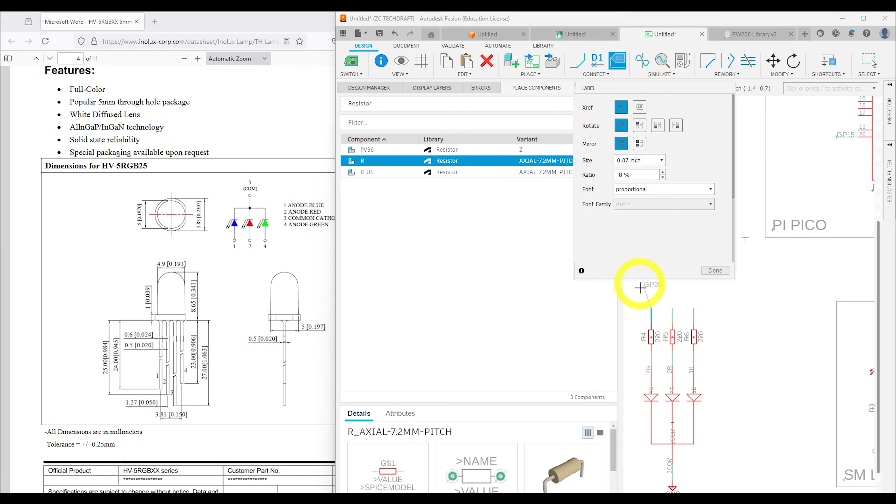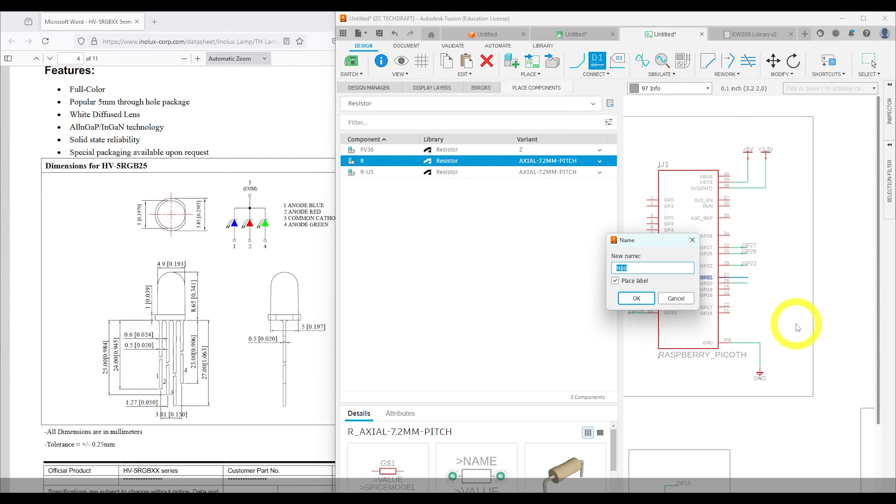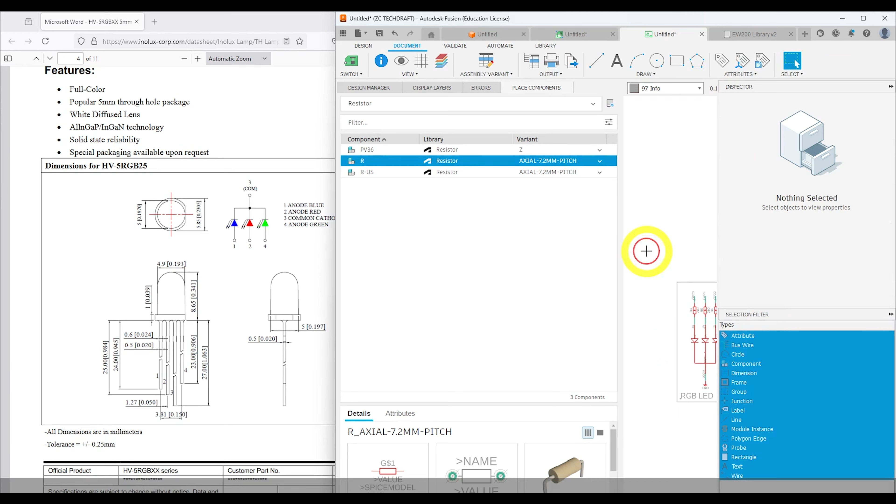I'm going to rotate it so it's kind of vertical with it. And let's go ahead and place that. All right, go to name and GP22. GP21 and GP20. All right, let's go ahead and draw a box around that. Put a label and make this RGB LED. All right, so there we have our schematic completely made.

We do want to make sure there's nothing wrong with this though. So I'm going to go to errors. I'm going to click update. And we have a couple errors here. So unconnected input pin on U1 run. The board is saying that we need something connected to that, but that's not true. So we can just approve it. Same with ADC ref and 3.3 volt and VBus.

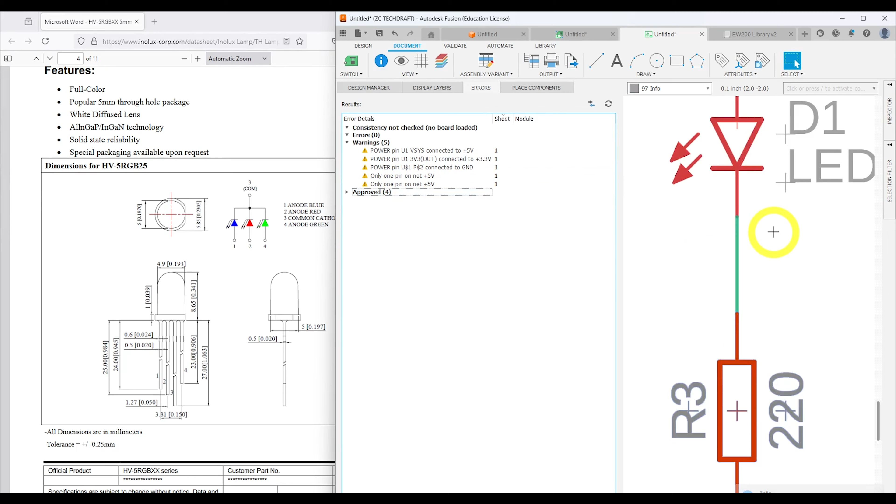Part 3 or R3 has no value. So nice catch. I'm going to click V on my keyboard and click on that and give that a value of 220. I'm going to just refresh. And then each of these are okay. It's just kind of errors with the Pico saying like, hey, this pin shouldn't be power, even though it should be power. So I'm going to approve.

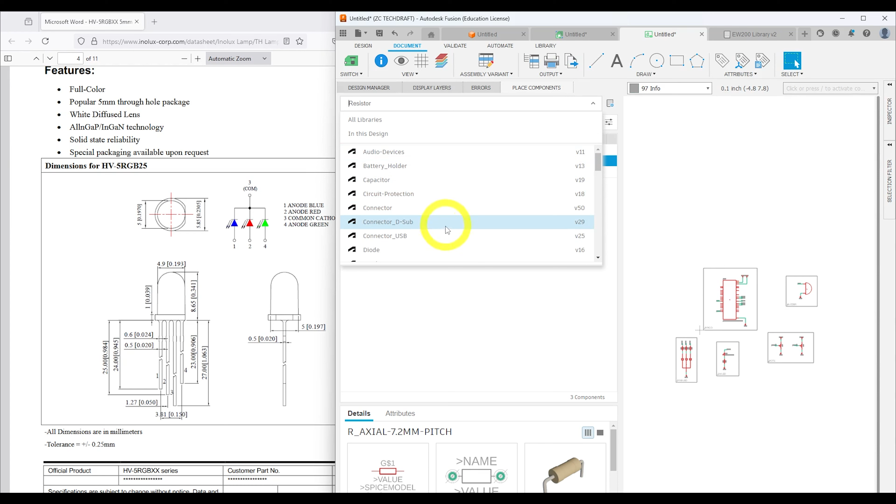All right. Let's go ahead and go to place components, click the drop down, and where is it? I always forget what it's called, but we're looking for our title block. Frames. Sorry about that. And we want a frame B. Should be big enough. And there we go. We have our object. All right.

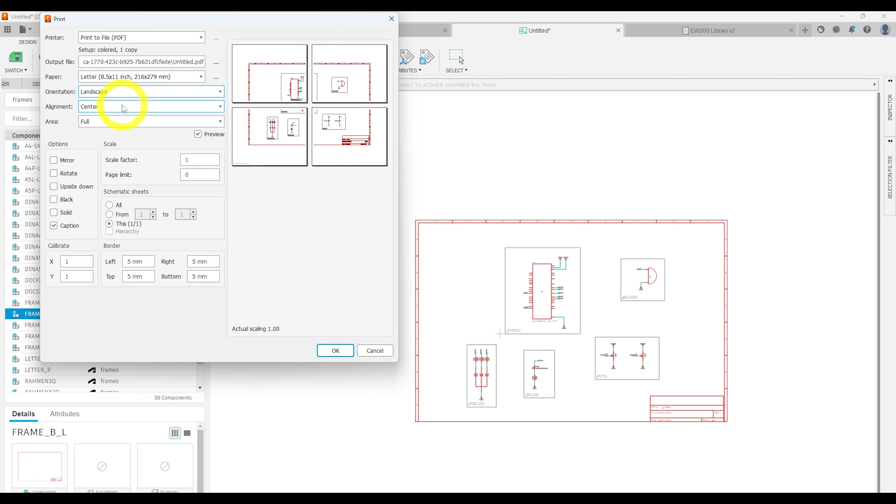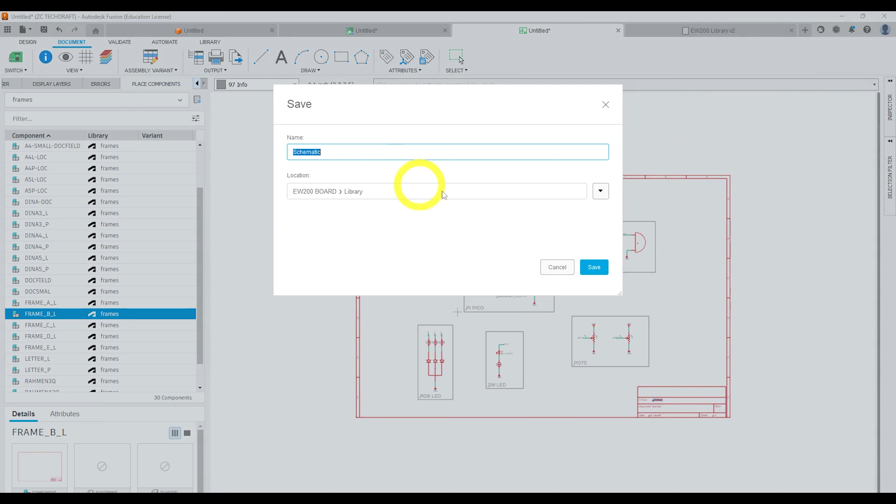So we can go ahead and print this as a PDF. And then our orientation is landscape. Alignment is center. Area is full. And I want to scale this, say 0.5, just as long as it's on one page. And I can click OK, export this, and this then is done. Oh, I did forget to change my title. But if I click Control S to save this, and I can click Save, and it'll update it. All right. So that's it for our schematic.